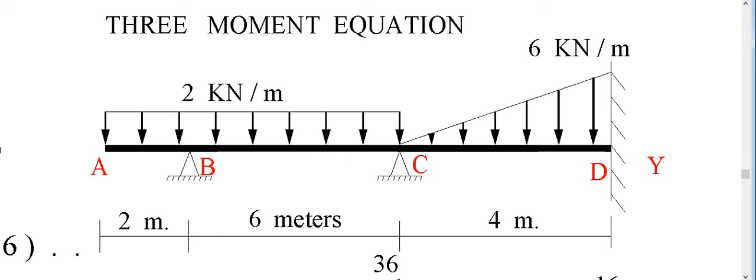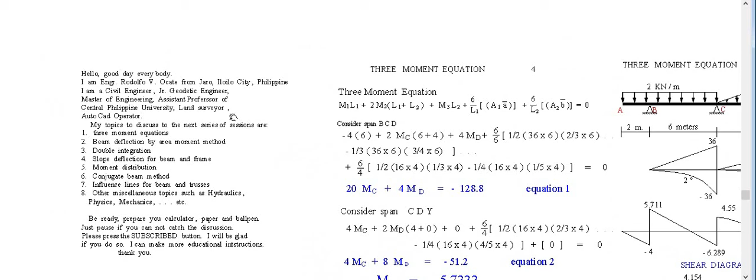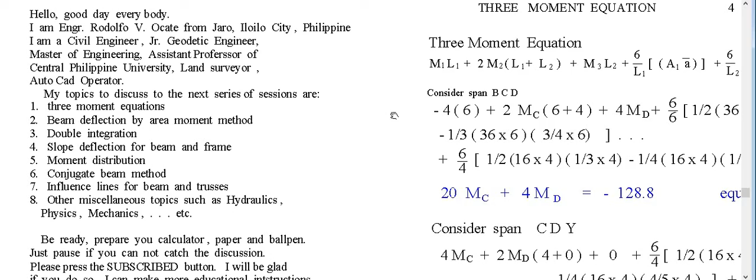These are my topics scheduled for a series of sessions. Today I will have this fourth session, the three moment equation, given this two span loadings: uniform load and triangular load, with distances 2, 6 and 4.

This is the basic equation of the three moment equation. M1L1, this is the moment on the left of BCD. This three moment equation uses two spans at a time when we analyze this, so we have two unknowns, C and D, the moment at C and moment at D.

So when we have two unknown moments, we usually need two equations. One equation considers two spans at a time, BCD is one, then the other equation is created using an imaginary span DY. So we have two spans again, CDY, where the right portion is imaginary. We create an equation here. Now it is a requirement, in order to solve this three moment equation, that the area is found in this figure, area 1. Area 2 is this one.

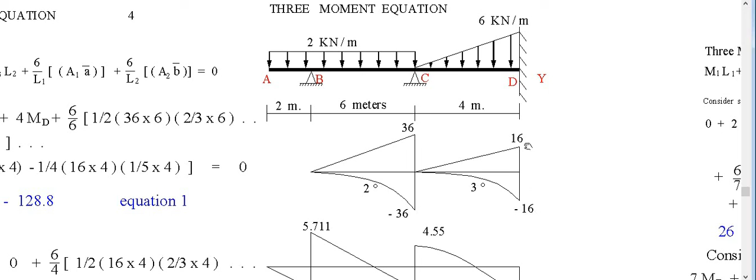So we need this to solve these two: the left one is this one, the right one is this one. Now, two spans at a time, so we consider BCD alone, excluding AB, because we are considering BCD only.

So on the left, the true moment at B is 2 times 2 times 1. This is the actual moment at B, so 4, the moment at B is 4 negative, times 1 minus 4. Then the left span is 6, 1. Then twice the moment at the center, moment of BCD, is C. Twice the moment at C, then sum of span 1 and span 2, 6 plus 4.

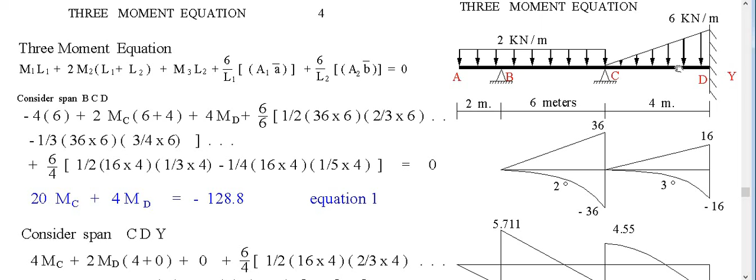Then this one is the moment on the right, moment at D times 4, L2 is the right span. Then for the constant, on the left, 6/6, this is the left side of the two spans.

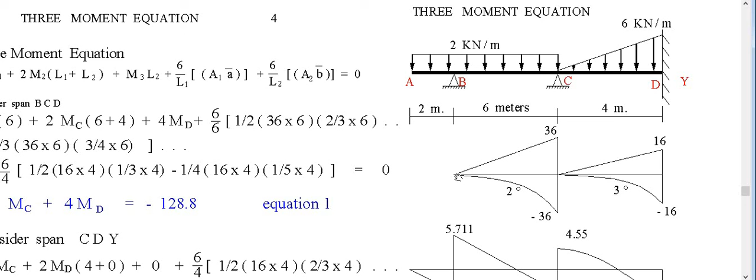Then the area is 1/2 of the area, 1/2 of 36 by 6, times the distance of 2/3 of 6. The origin of the distance here of the left moment by parts must be on the left. Now this lower portion, negative, second degree, 1/3 of 36 by 6, times the distance of 3/4 of 6.

Now, because this is two spans, the first span is this one. The second span is this one, 6/4, this one, 6/4.

The area here, triangular loading, is 1/2 of 16 by 4, times the distance. For the second, right moment by parts, the origin of the distance must also be on the right, so 1/2 of 16 by 4, times 1/3 of 4.

Minus this negative third degree curve, so minus 1/4 of 16 by 4. Distance from here up to the centroid is 1/5, so 1/5 of 4.

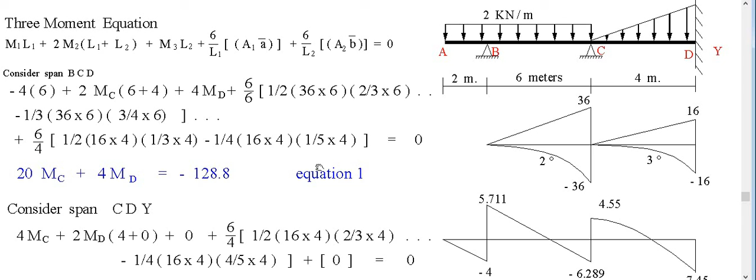Solving for this: 10 times 2 is 20, MC, 4 MD, the constant minus 128. If you solve this it must be 128, this is positive, this is negative.

Be sure to check and include this one. Oftentimes students misinterpret the result because this one is excluded, so be sure to include this. So the constant is minus 128.8, negative, because usually the moment at C is negative, and the moment at D is usually negative, so these two are negative and the constant must be negative.

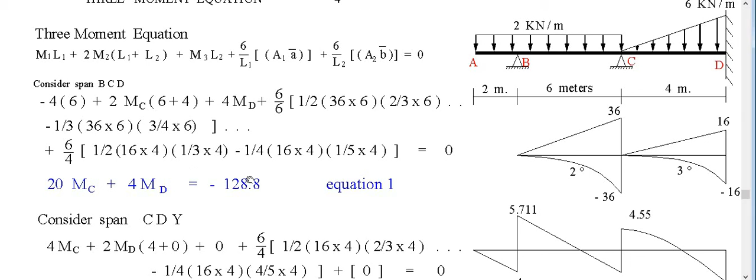Okay, this is equation 1, for BCD. The next equation is for the two span CDY, only that DY is imaginary. We create another equation for CDY, so consider the span CDY. Again we use this equation for CDY. The moment at C is unknown, on the left side, the distance is 4.

Distance is 4. The middle moment is twice the moment at D. The distance L1 plus L2 is 4 plus imaginary 0. Then the moment on the right of CDY, but the moment at Y is 0, so no moment.

Then the constant here, 6 over L1. This is the left span of CDY. 6 over 4 times the area of this, 6 over 4 times 1/2 16 by 4.

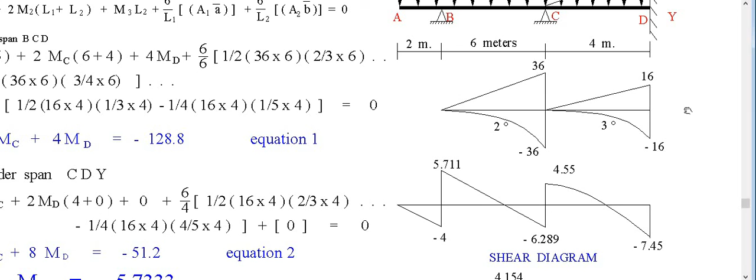So 1/4, 16 by 4. The distance is 4/5 of 4, from here up to here, 4/5 of 4. Then the second span of CDY is 0. There is no area, so 0.

Solving this, 4mc, 8md, all of this constant, the sum of this and this is positive, but you transfer that to the right, and it becomes negative minus 51.2.

So equation 2, these two, equation 1 and equation 2, solving by simultaneous equation, MC becomes minus 5.7333. MD is minus 3.5333. Okay, so the moment here is now solved.

Moment C, moment D is solved. Moment B is minus 4, negative. Negative moment, negative moment, negative moment. All three are negative moments.

Now the reaction, okay, RB. First I will bring this drawing down below. RB, okay, bring it nearer to the solution.

Okay, then solving for RD, going up RD here, or reaction at D. Consider the right of the cut section CD. You cut here, then there appears the moment at C as counterclockwise of 5.733 counterclockwise. Okay, solving for RD.

RD times 4 is equal to opposite direction 1/2 6 by 4, 6 by 4. Distance from C is 2/3 of 4, and...

There are two moments that involve here, moment at D and moment at C. These two moments are different direction, clockwise, counterclockwise. So moment at D is the same direction as the triangular, this is clockwise, this is also clockwise with respect to C. Okay, these two.

Moment at D is the same rotation as with this, so this is this one. Moment at D is 3.533 positive, the same direction as this one, while the moment at C is opposite as with the moment at D, so minus 5.733. Okay, I hope you don't confuse.

Now we have solved RB, RC, RD. These three, if you add these three, must equal the total external load. This 16, and this is 6 times 2, 12, 16 and 16 and 12. So check that with your calculator.

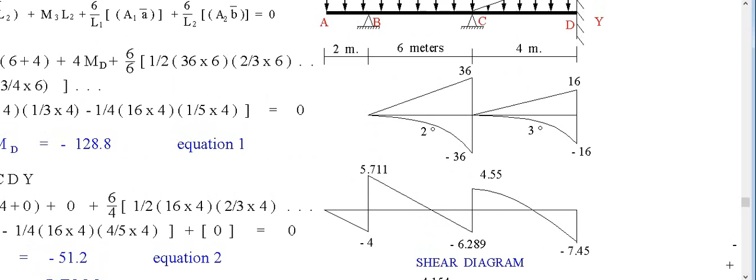Now given the three reactions, we can draw this shear and moment diagram. This is the shear diagram given that three forces. 7.45 is RD. Okay, and moment diagram will look like this, parabolic here, while here 3rd degree.

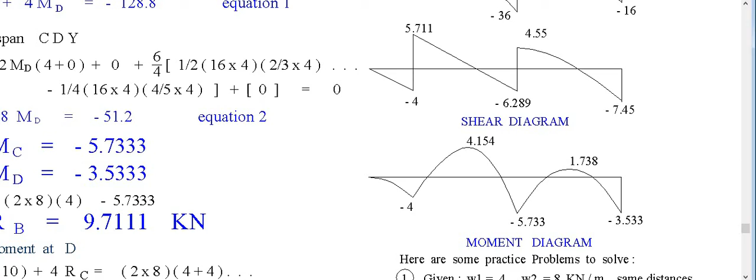Okay, this topic, the discussion of this is under the strength of material, so I will not discuss this in detail. That concludes now the discussion on how to solve this beam. Now for you to practice, I have here example problem.

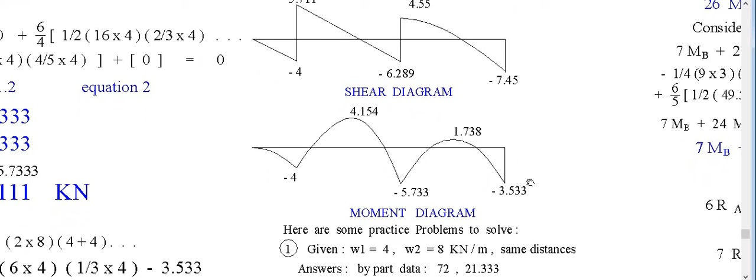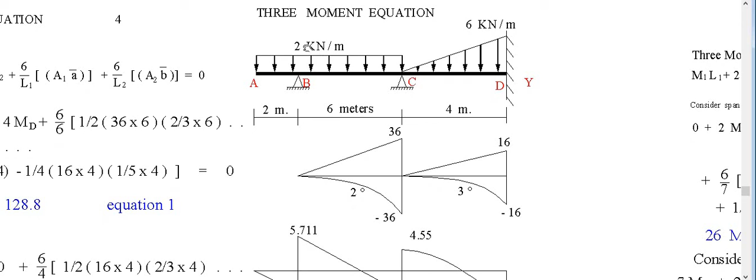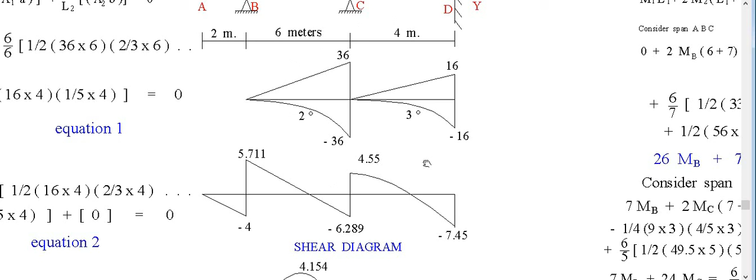Replace W1 by 4, instead of 2, you replace this by 4, and instead of the other one, replace this 6 into 8. Then solving for the moment by parts, instead of 36 and 16, the answer is 72 and 21.33.

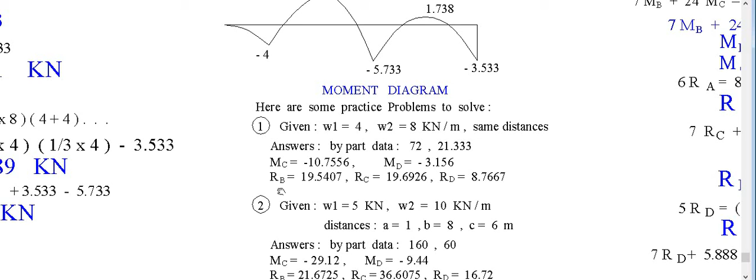Then the moment at C is this one, the moment at D this. The three reactions RB, RC and RD. Okay, that is example 1.

Example 2, the same. Replace W1, W2, then the distances, replace that also with this. Answer this one.